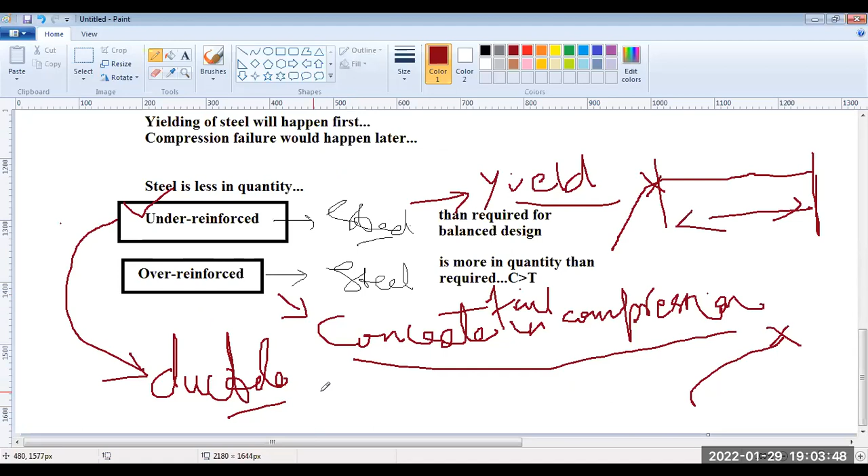So what I was saying is that the first reason for under reinforced design, I just discussed that. The second reason for under reinforced design is... just a minute, there are many others joining.

So the first reason I've explained to you, that we allow it to go into the ductile zone. The second reason is that balanced design does not work always. Why doesn't it work?

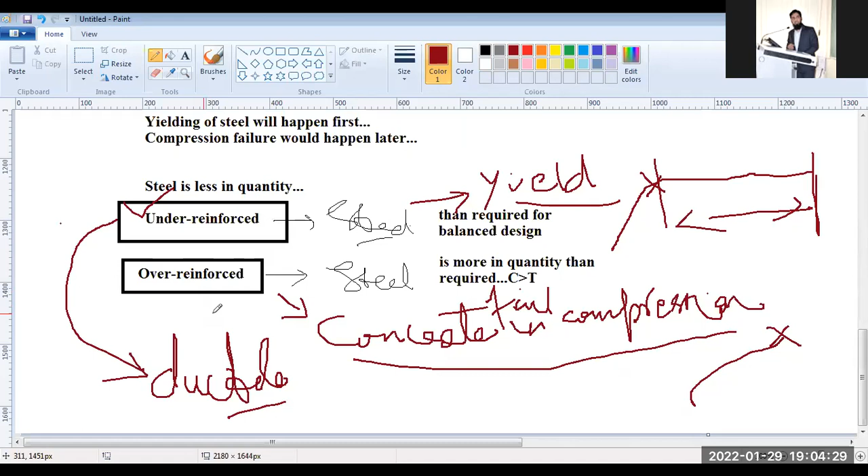Because you will never get a section where you will be able to achieve the balanced design. Why? Because it involves the compression side, where you have FCK, B and D. Now FCK has to be clear.

If its FCK is 20 megapascals, if its strength is M20, it should be M20. B should be clear, it has got the dimension. D should be clear. Now these two, B and D, can be maintained, but FCK cannot be maintained in concrete due to workmanship problems. And I've already discussed that if you are getting 20 megapascals for a cube in the lab, at the site you may not get 20 megapascals.

So whatever is desired, you will usually get less FCK at the site than desired. But FY is not a problem, because steel is manufactured in a workshop, in a factory. So FY would always be perfect. Whatever result you got in testing in the laboratory for FY, you will have the same FY for the steel at the site as well.

So if you are designing for a balanced approach, you took FCK as 20, but actually you got less than 20, so your XU will get more, because when this FCK becomes less than 20, your XU will increase. What does XU increasing mean? This means going towards over reinforced design. So over reinforced is a much more problematic design approach, because that leads to much earlier failure of concrete in compression due to brittleness.

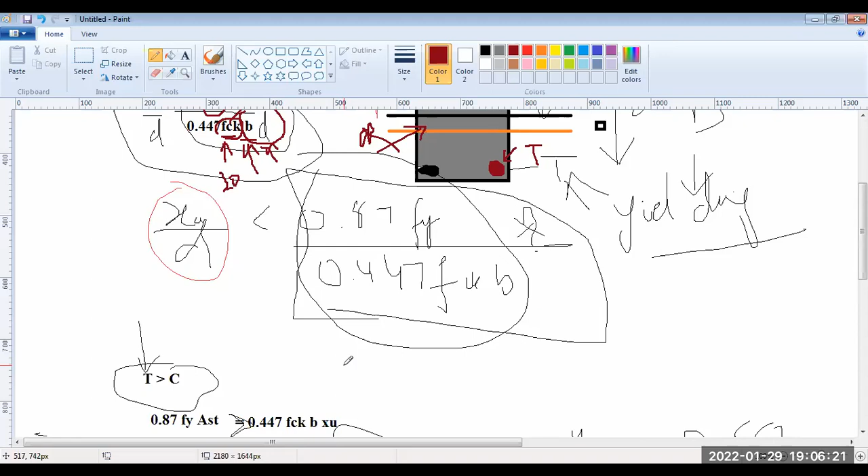Clear? Anyone who couldn't understand this second point? Anyone who couldn't understand the second point? I'll repeat it again then.

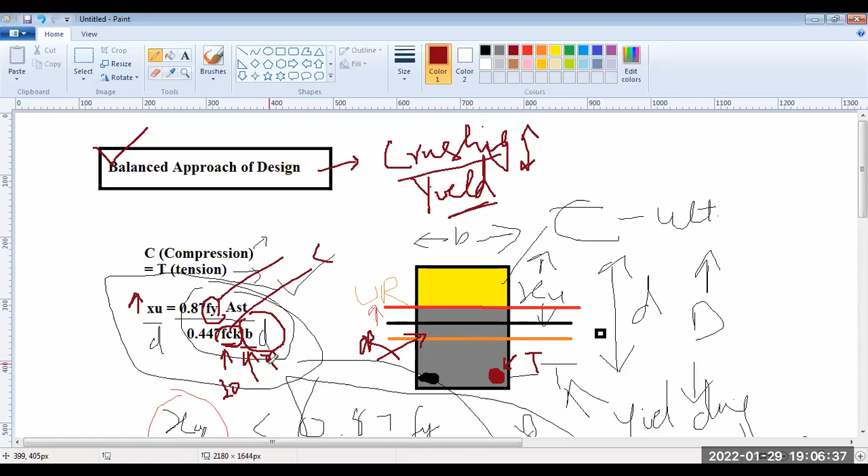So what I just told you is that we have to go for the under reinforced design approach in our design for structures. Now that would mean we take under-reinforced as the design approach in our design. Most of the time we adopt this.

And here now, what is clear is that your XU will be less than XU max. What is maximum XU? Maximum XU we will call that which is for balanced design. So here for under reinforcement, it is less than XU max.

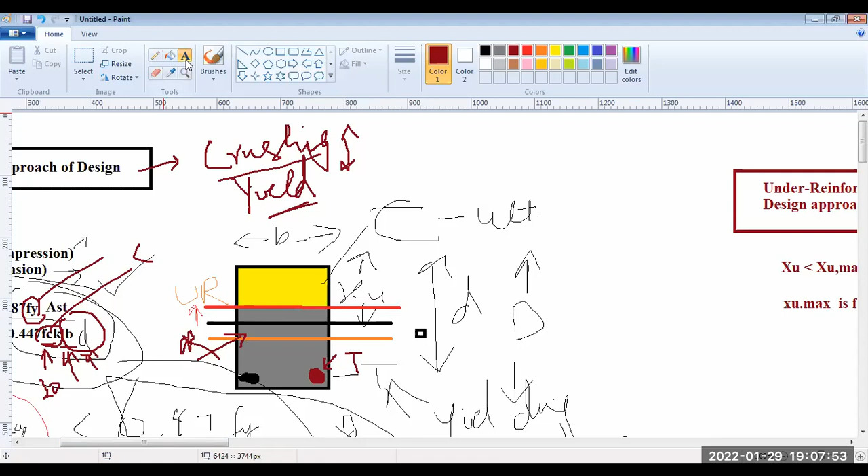I'll just redraw the same figure that was drawn here. This is your rectangular beam section, for example. Let this be in black color. So this is your balanced. Then you have the red color now. This is your under reinforced.

So this will be your XU, and your XU max is this. XU max is this one. So XU max is for balanced, and XU is for your under reinforced design. So we take XU less than XU max.

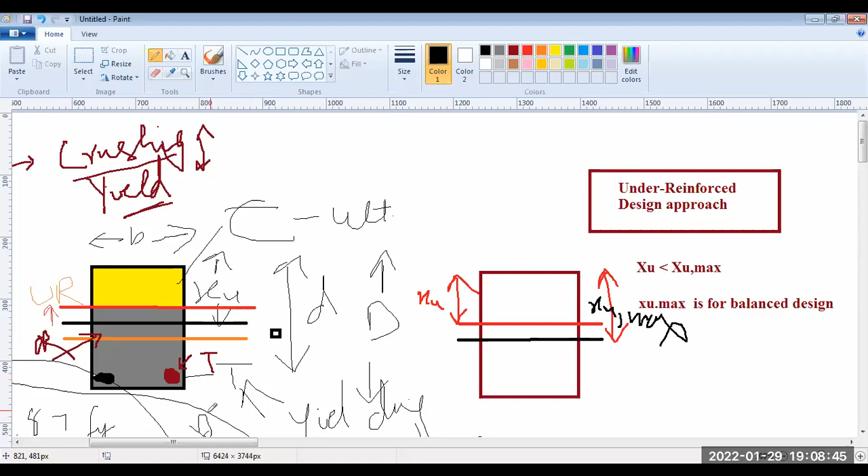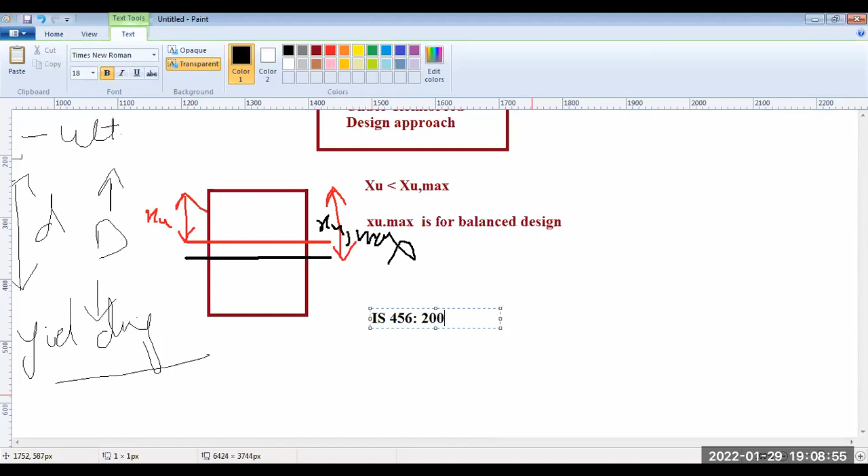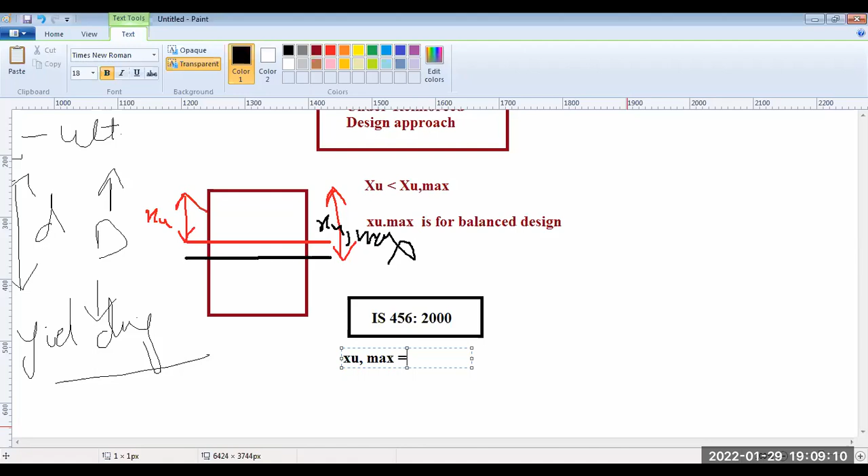Now, as per codes, for the first time we are using the code IS 456 2000. We'll be using, as per codes, the value of XU max given to us, but you can calculate this as well. Let's calculate it. What is the value of XU max? It's 0.87 FY AST by 0.447 FCK B.

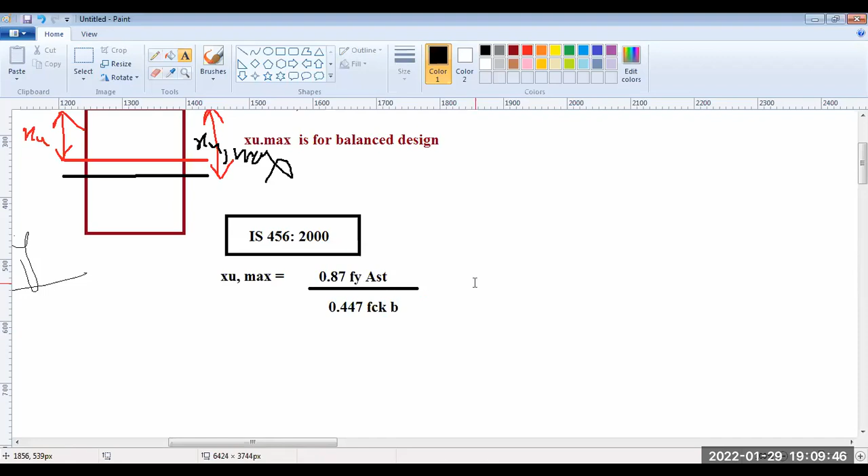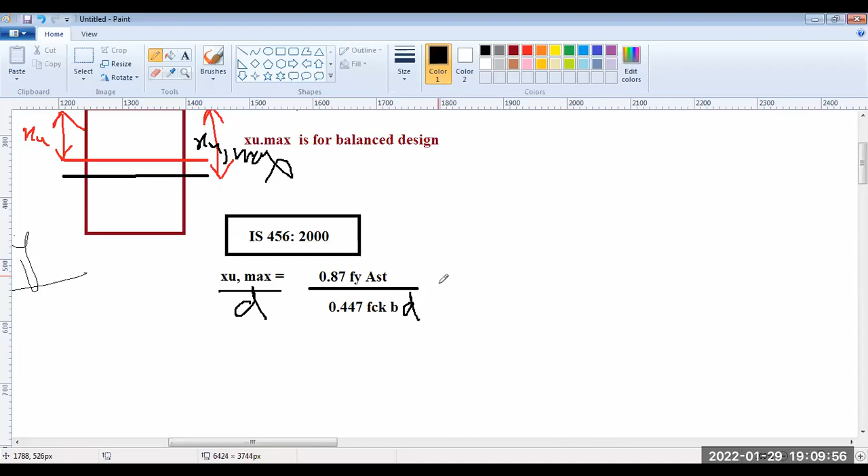Now, if I again add D on both sides, this would be equal to... FY will have different values. For example, if I take FY of 500 grade steel, its FY will be 500 megapascals. If I take Fe 500, then it's 500 into, before that there is divide, this is 0.447 FCK. For example, you are taking 20 megapascal strength of concrete, then into this you will get AST by BD.

Now, what is AST by BD? What is AST? Any one of you? What is AST? Bar. So it's the total area of all bars of steel in tension.

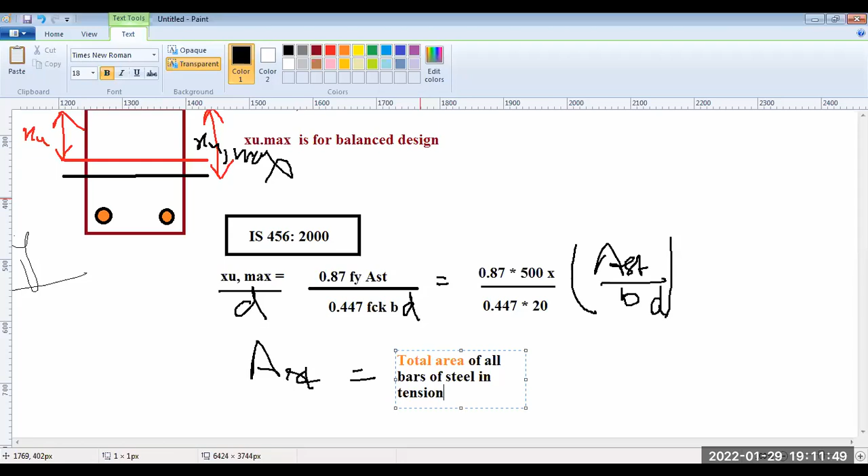AST, A means area, S means steel, T means in tension. So tension is on the bottom side. The bars which are in tension are the bottom bar steels. So that's AST. So on the tension side, whatever total steel is there, its cross sectional area - there are 2 bars, so their total combined cross sectional area is π/4 d square, D is the diameter of this bar, and the other bar similarly π/4 d square, and combining both you get AST. So the total cross sectional area of these bars.

What is B and D now? What is B and D now?

This is your B and D. D is your effective depth of the bars. So what is B cross D equal to? B multiplied by D, what will it give?

Any one of you? Yes, Sahil is here. What will be B cross D? So, area. Area of what? So cross section of concrete.

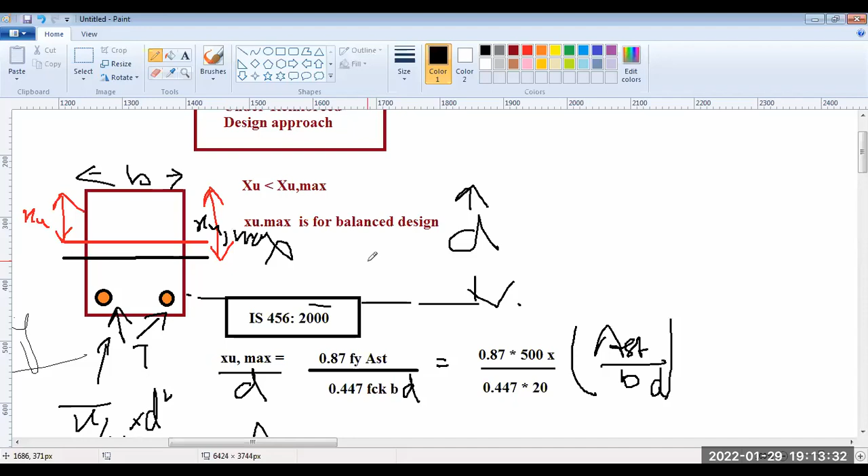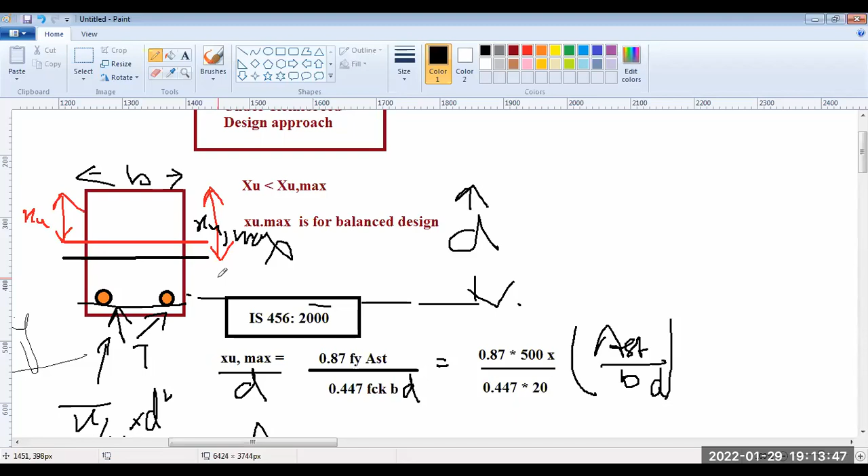It will be cross section of concrete, area of concrete. So it will be effective area of concrete, excluding the cover. Because we are taking effective depth, we exclude the effective cover, rest of the area of concrete. So this is area of steel in tension, and this is area of concrete.

So area of steel by area of concrete will give you percentage of steel in concrete. Percentage area of steel in concrete - how much area of steel is there within this body of concrete? Total body of concrete mein kitna percentage area aapka steel ka hai? You can get from this, but once you multiply it by 100, then you will get the percentage.

Right now, you're just getting the ratio of the area of steel to the ratio of the area of concrete, effective area of concrete. So this is AST by BD.

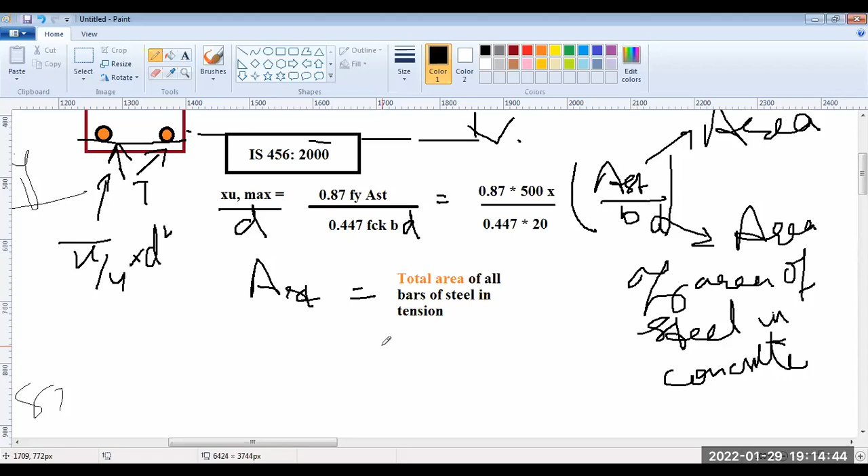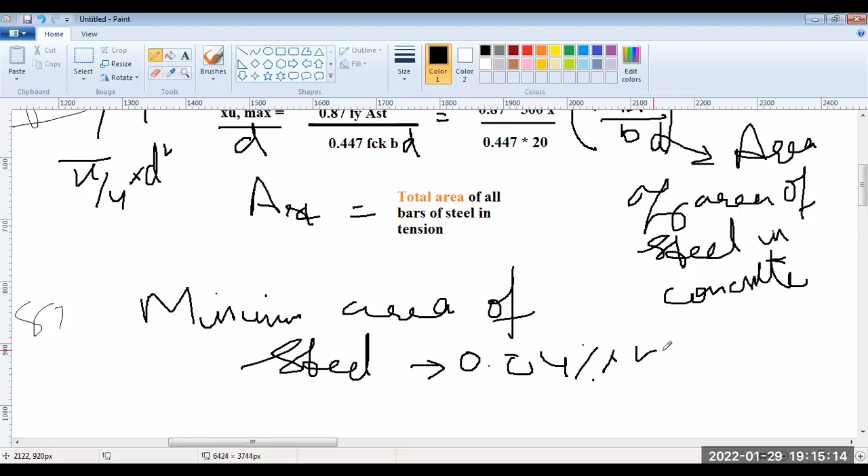Now there is minimum amount of steel that we have to always provide in concrete, minimum in beams for example, minimum area of steel has to be provided. And the minimum area of steel that we provide is 0.24% of BD. This is the minimum area of steel that we usually provide.

So if you now replace this by 0.24, you will get the value of XU max by D for minimum area of steel ke liye. Now, why is there minimum area of steel? I'll come to that once we move into the design of the beams and the other members.

So right now, if you go to the codes, they have actually mentioned - I'll be sharing with you the codes. You should all have your code in front of you printed, even while this class is going on right now.

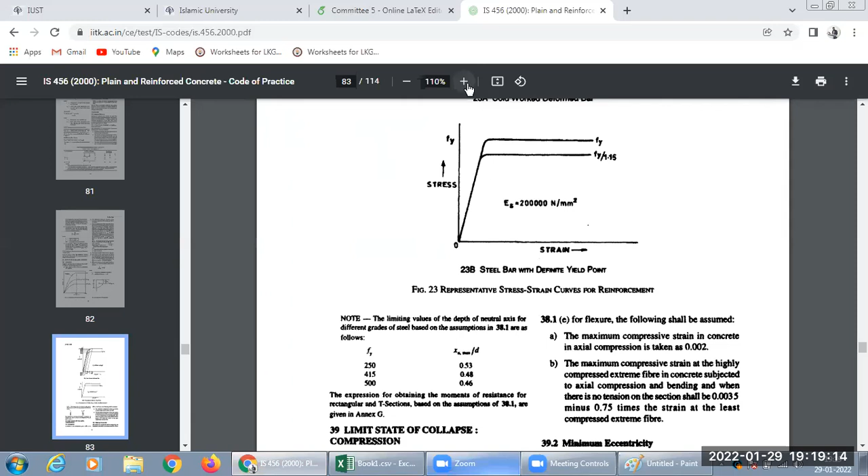This is the limiting value of XU max by D for FY different grades of steel. They have limiting values. This is based on, again, this is based on - they have actually taken AST by BD as the minimum ratio, and FCK, this is around for 20 megapascal, this is valid.

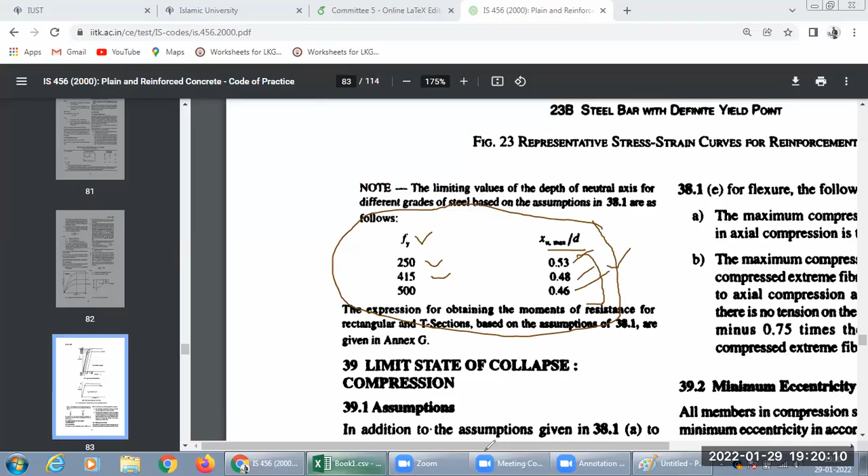So XU max by D has been taken by the code for different grades of steel. So you have to remember: for 250 grade it will be 0.53, for 415 it's 0.48, and for 500 it's 0.46. So these are the values of XU max by D. So you note it down.

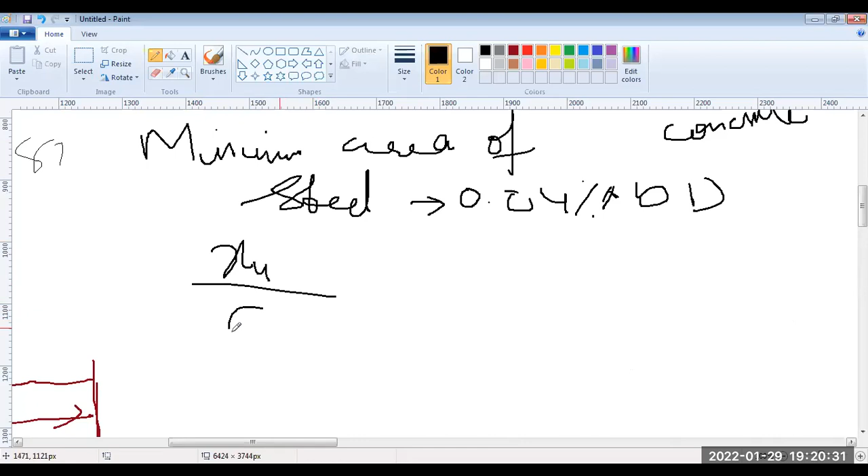XU max by D. So thereby your XU, it's 0.5. How much was it? It was 0.46. If it's FE 500.

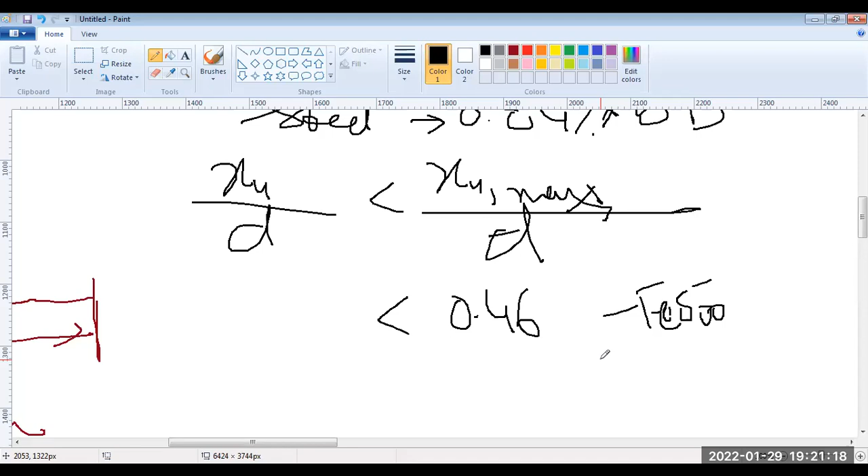So your XU by D, if it's less than 0.46 for FE 500, vaise hi for FE 415 ke liye agar 0.48 se kam hai, then your design is under reinforced design. So this is the concept of under reinforced design approach. Any questions on this? We'll continue further then.

So now what is flexural design of concrete members? What is it based on? We'll go step by step. First of all, you have a beam now, and now we know beam has got a width b. It will have a depth overall d,

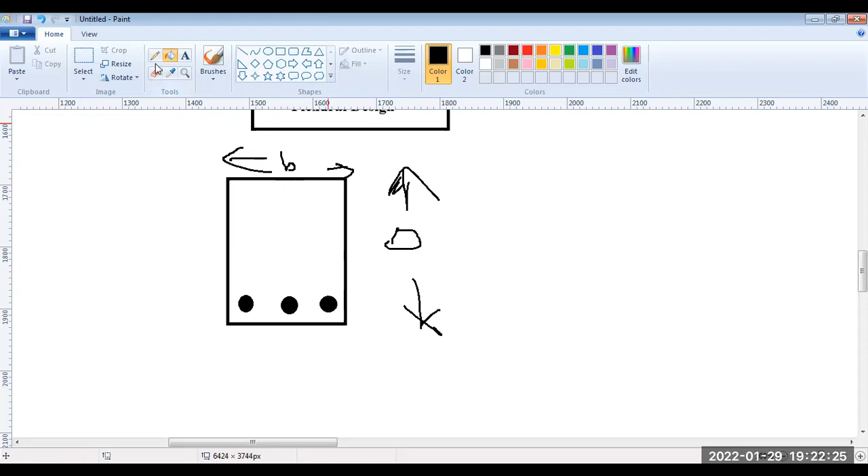and then it will have steel. You will have steel bars in tension zone - 1, 2, 3. How many? 4 or 5? Any number of steel bars in tension zone, these ones. So then you will have this as effective depth d. From where till up to which point is the effective depth?

Let me show you on larger screen. For example, you have this as the - I'm enlarging this figure.

This is concrete, the outer section of it. I'm cutting the section somewhere here. This is the bottom portion of the concrete I'm showing you. You have the steel bar somewhere here, one, and similarly another steel bar here. Now this center line going through this point here.

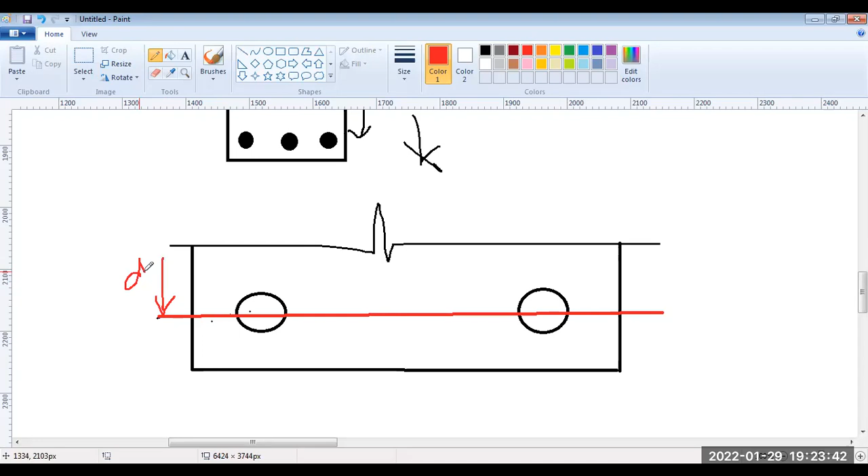This decides your effective depth. So effective depth you always calculate above this line, the center of the bar D, up till the top of this beam. That's your effective depth. So what is your effective cover now?

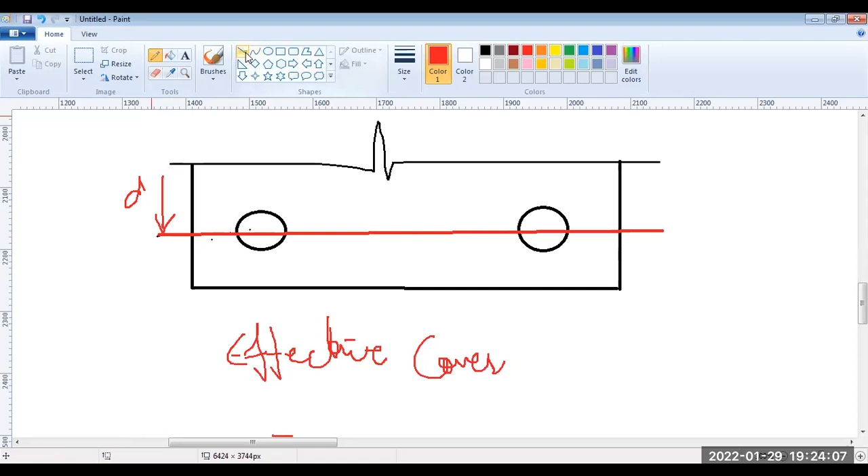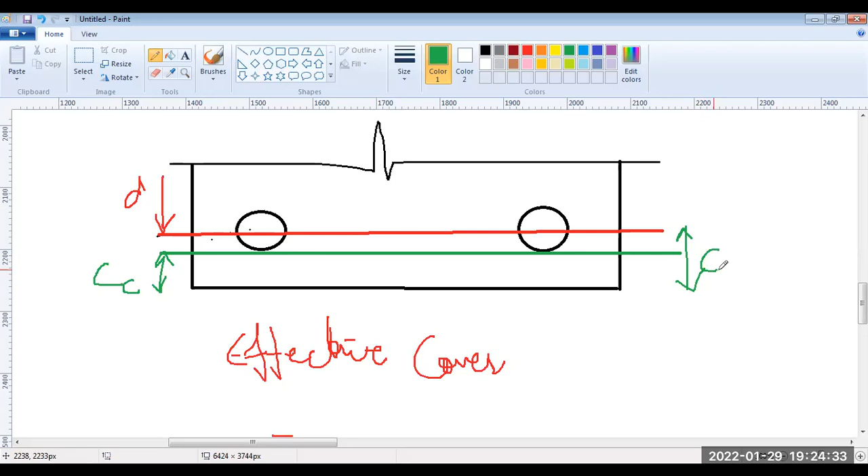How much is your effective cover? Yes, any one of you? It is, number one, you are taking the steel bar ke neeche jo bhi portion hai, if you resemble that by concrete cover C, clear cover CC, and then you have from the bottom up till this red line, that is effective cover. So effective cover CE would be how much? It would be CC neeche jo hai green line ke neeche, and then between these two lines, the red line or green line ke beech mein, it is half of the bar dia, steel bar ka dia.

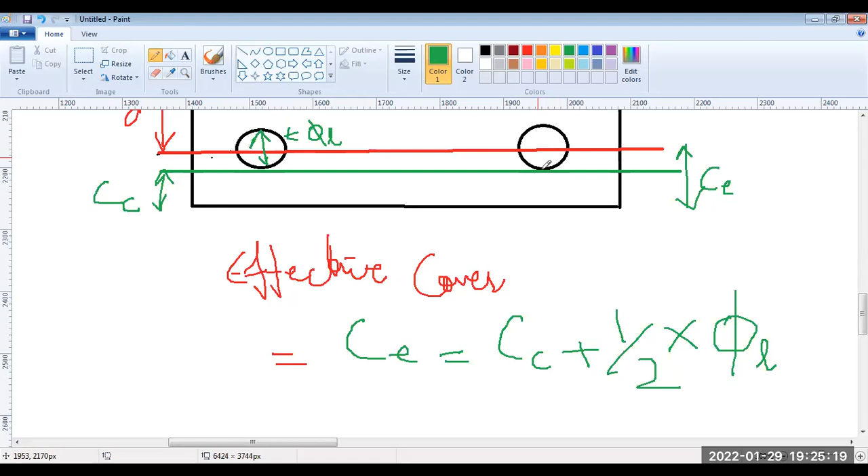If the steel bar dia is phi L, agar uska dia phi L hai, iska, if this is phi L, the dia of this, it's phi L, then effective cover will be CC plus half of this dia, that is the radius of this bar.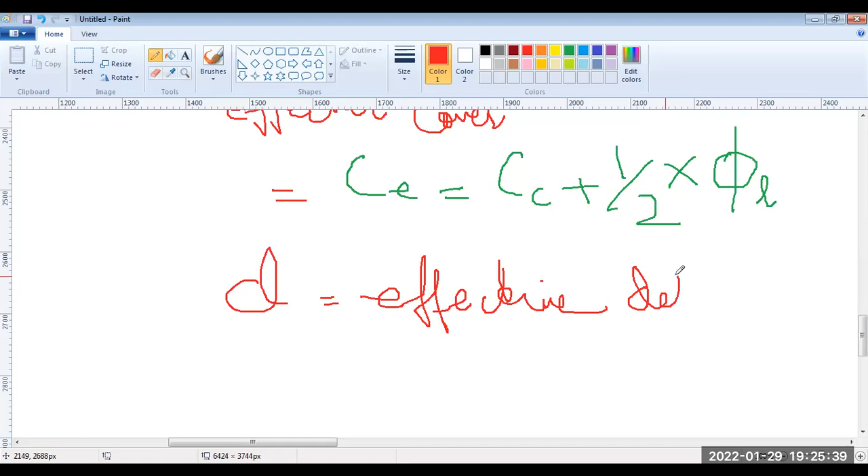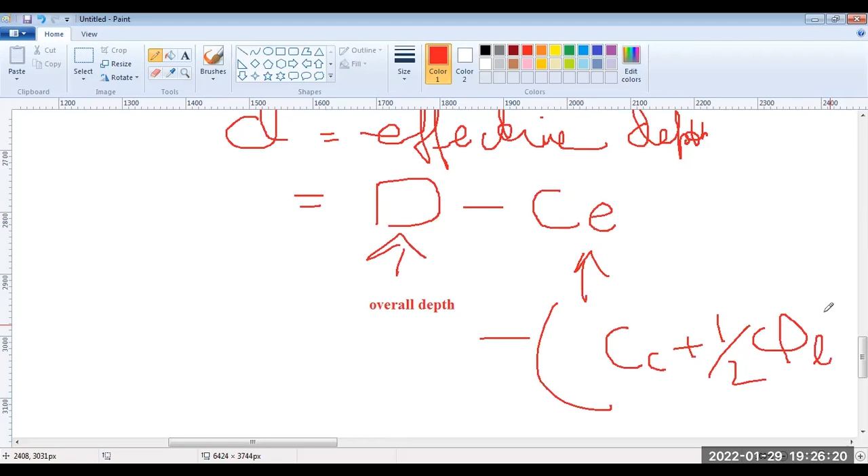So now you are clear that D, your effective depth, is equal to capital D, jo ki overall depth hai, this is overall depth, minus CE. And now you all know that what is CE? CE is this, CC plus half times phi. So you can say it's minus CC plus half of phi L. So this is your effective depth D, from the overall depth.

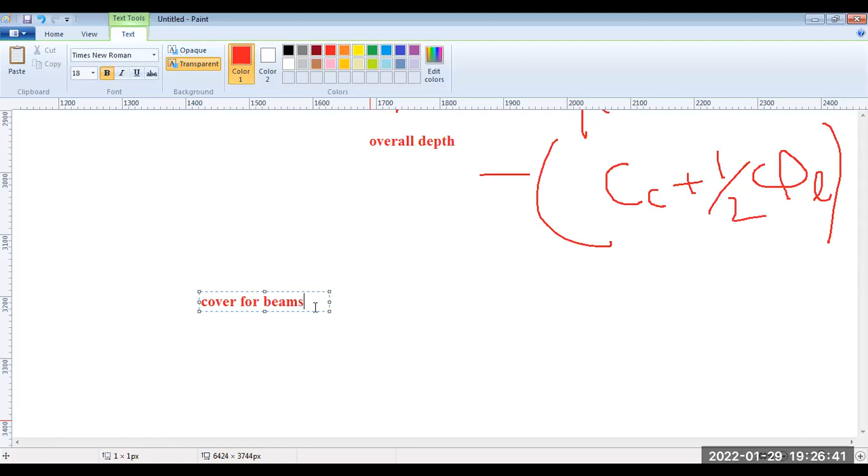Now why do we provide cover? The first question about the cover, why do we provide cover for beams? Any one of you? Up till this point you must have now learned why do we provide cover. Any one of you who wants to answer this? Why do we provide cover for beams?

To prevent corrosion, yes, that's one of the reasons. Corrosion prevention. But first reason always would be because we want to embed steel.

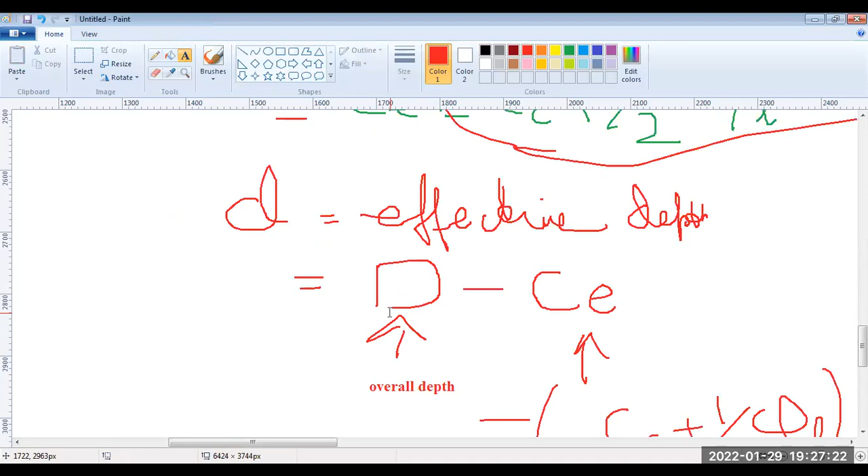Embed means where will the steel act together with beam agar wo steel iske saath bandha nahi hoga with the concrete. So you cannot tie the steel. Aap steel bar ko bahar tie nahi kar sakte aise beam ke saath at the bottom and then say ki main ye tension lega. It will not happen. You cannot tie this. So you have to embed it within the concrete.

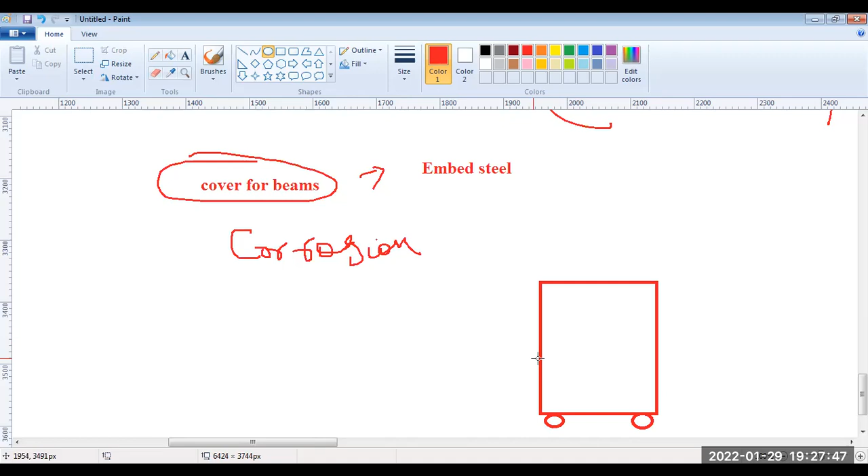So for embedding you require certain amount of cover. Now you would say that you could embed it like this. Why to provide anything on iske neeche kyun kuch dena hai? So yes, you can do this. So that's then the first reason, to keep the steel within the concrete you have to embed it.

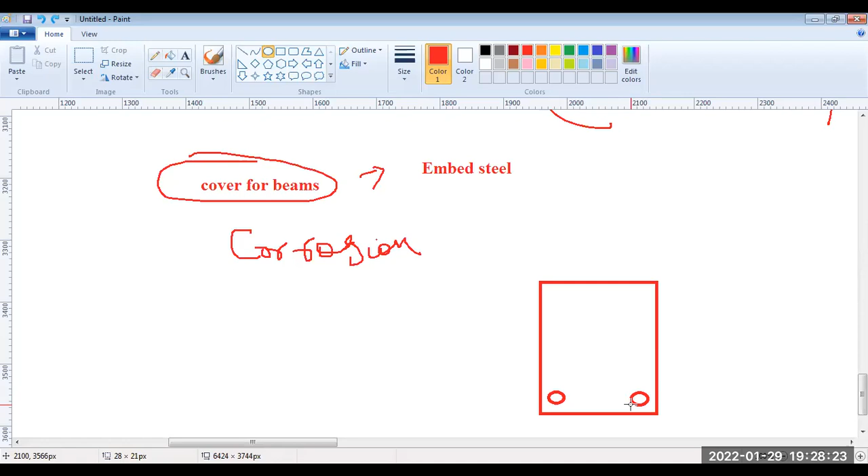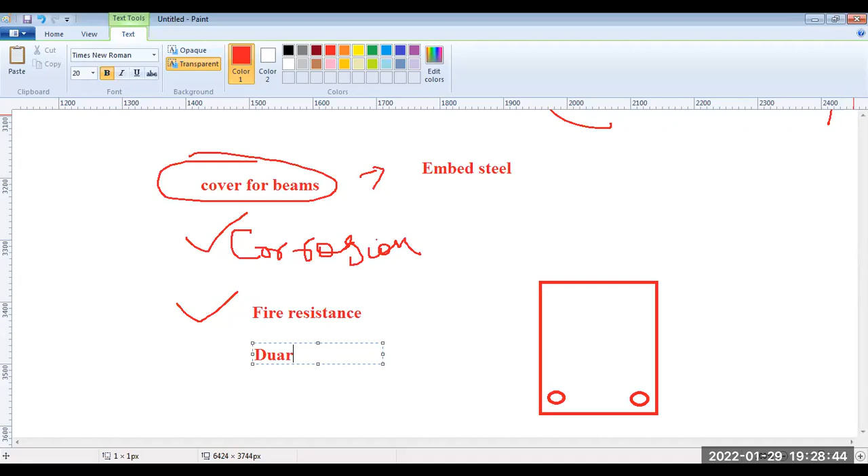Second reason to shift this, kyunki hum isko ab shift kar rahe hain, yahan bilkul neeche provide nahi kar rahe hain, hum isko we provide it somewhere after providing the clear cover. To uska reason number one is corrosion. This second reason is fire resistance. That's the second reason. Third reason, other than this, is long-term durability, which incorporates many things.

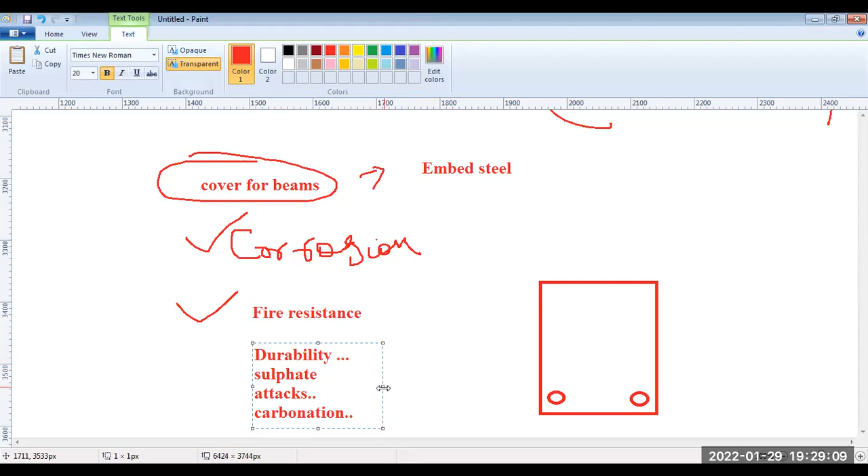We discussed in concrete technology, sulfate attacks happening. In concrete you have carbonation. So carbonation then leads to corrosion. So before that, the carbonation of concrete would have happened. So you need to provide the cover for many other durability related issues other than corrosion, which is also a durability related issue, but that's a predominant one.

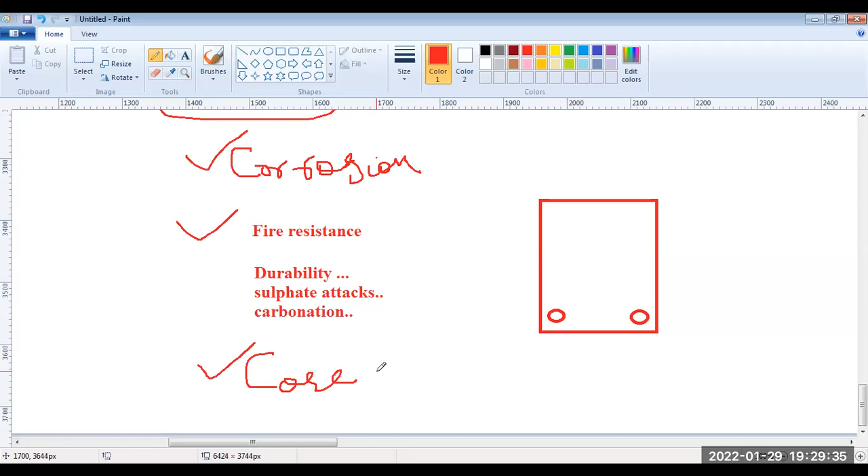Fire resistance, you need to provide the cover. Thirdly, you want the steel to be embedded not only properly, but with proper core within the core of the beam or column or any other element. You want it to be embedded within the core of that, such that it behaves together with the concrete.

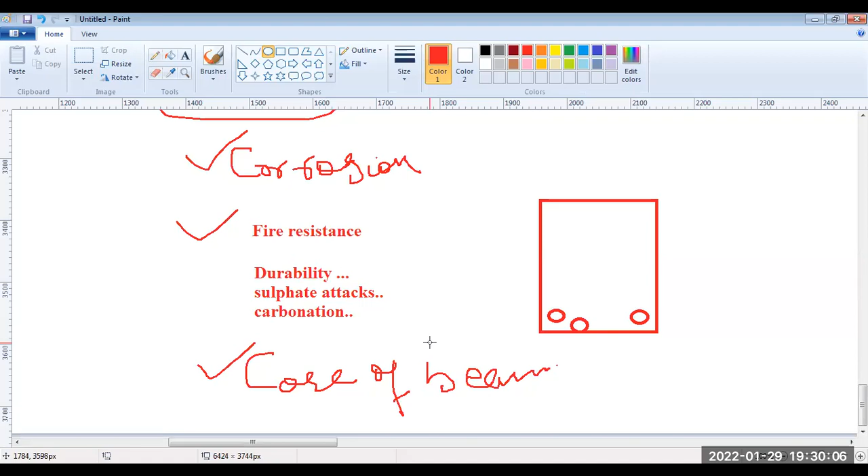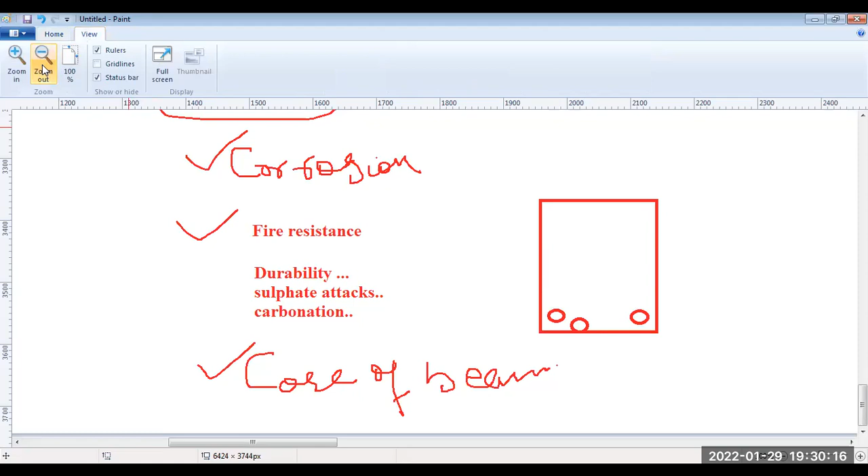Agar ek side se iske concrete na hua, if this bar was just near, so ek taraf se ye embedded nahi hota, then there would be no bond on this side. That would mean the bond strength would be lost between the two. They would not behave together. So these are the reasons that we provide cover to any structural elements. We also are providing cover to the beams as well.

Next, after cover, now you have for the same beam, next you are providing the steel. Other than steel, you are also providing, I'll make from another, this, you are providing a ring in the beam. Aur is ring ka kuch apna diameter hoga. So you would have something like this, a thick thing. This is a ring.

To ye ring hai kya? What is it? It's known as stirrup. For a beam, it's known as stirrups. Stirrup, S-T-I-R-R-U-P, stirrup. Now what is a stirrup?

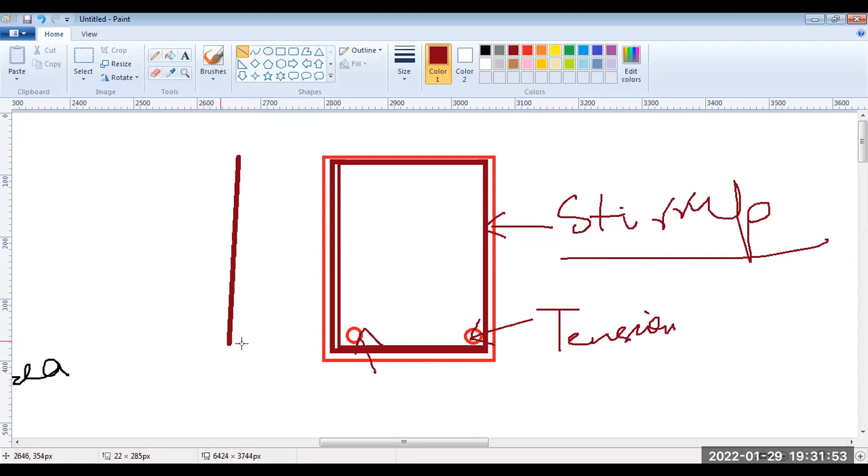What does it do? Is bar ka humein ab matlab pata chal gaya that it's taking tension. Why is this stirrup provided? Why is the ring provided? Any one of you who has a guess? Any guess? Any one of you who can guess? Stirrups are provided to take the shear loads.

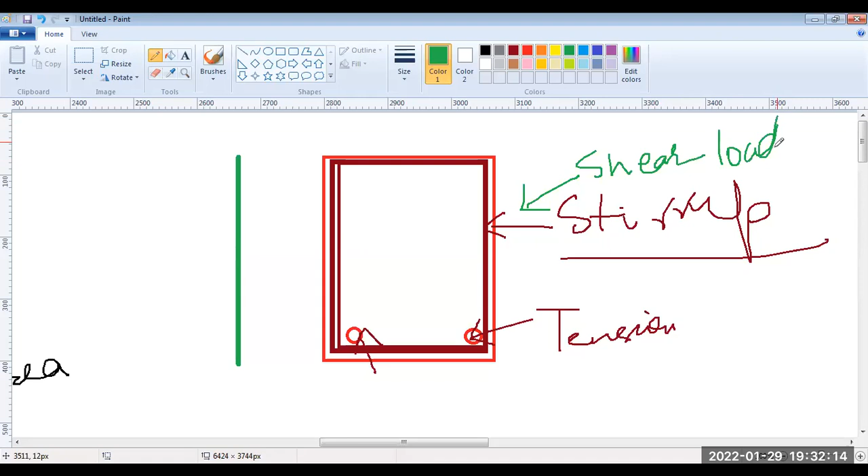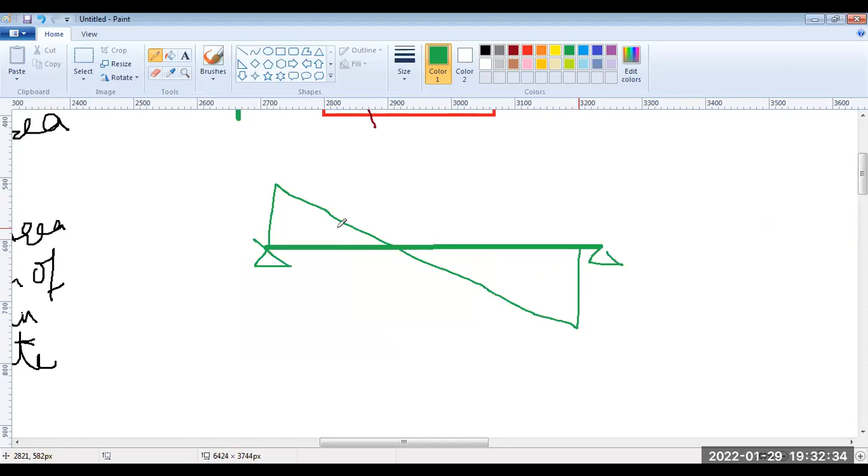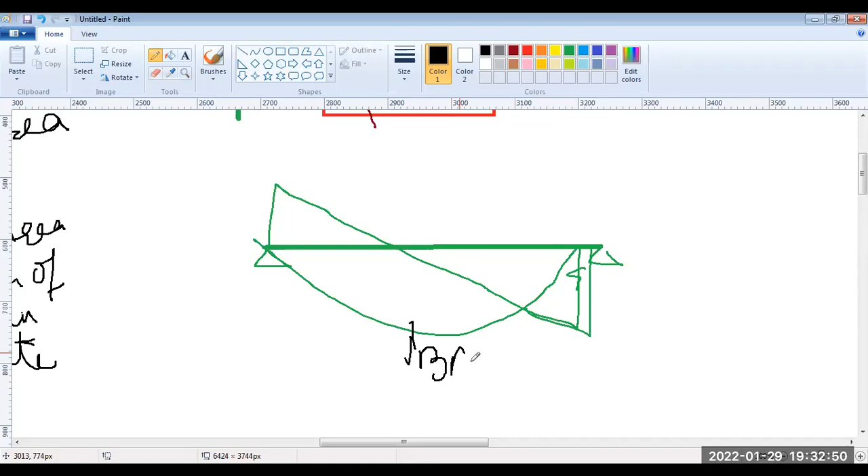How do the shear loads act in a beam? आपने पढ़ा होगा in structural analysis, you have a beam and then it's supported on the two ends, one and this is two. At the ends, you have more shear forces towards the supports. Similarly, your bending moment is more at the center rather than at the support. This is your bending moment and this is your shear profile for the beams. Now shear forces, they are more towards the supports.

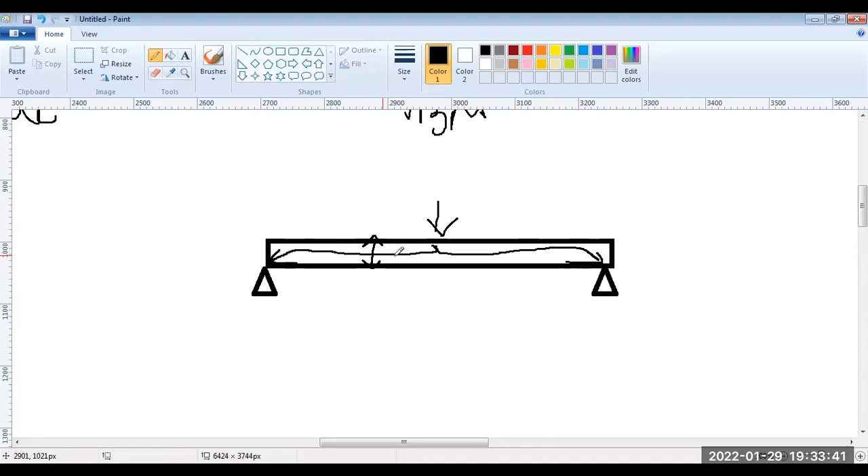How do the shear forces actually act onto the beam? This is your beam along with its depth. If there is a load acting here, forces travel like this. They have to go towards the support. हर force को it has to travel like ये पानी की तरह flow करता है towards the support. So shear forces are traveling towards the supports. They usually take the center path. ये center. तो जो ये depth है इसकी, they are taking the center path. Most of the forces are going through the center path.

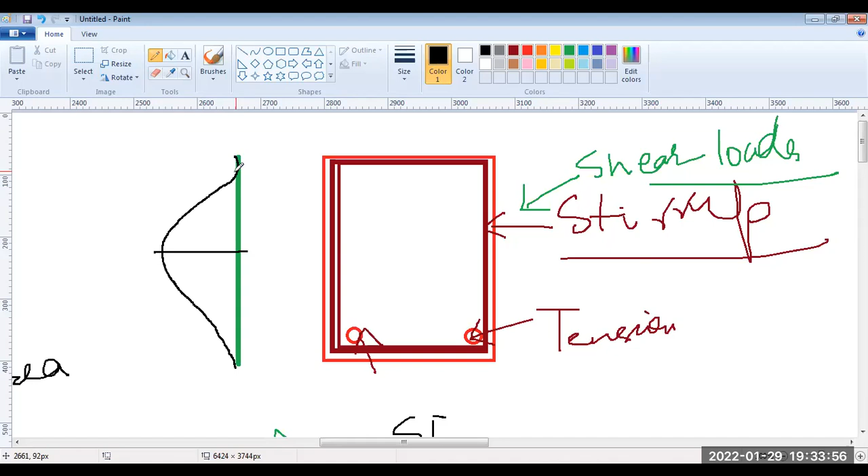So thereby, the maximum shear forces are at the center along the depth of the beam. So the maximum shear force, it's a parabolic graph, minimum at the edge and maximum at the center, right at the center, not at the neutral axis, but center. Neutral axis is a different thing that's meant for compression, flexural forces. This is shear force. So under shear force SF, you have the maximum forces acting at the center depth of this beam section.

So वो prevent करने के लिए, now how do the shear forces then cause failure? They will cause failure towards the center along this central plane, shear plane, and the shear plane would then be the depth of this. But कैसे act करेंगे? At the center of this, it will be acting more. So जो ये screen है, इस screen के बिल्कुल perpendicular the shear forces are flowing. यहाँ पर they are flowing perpendicular. I cannot show you that. अगर मैं पेन लेता हूँ, it could be flowing through the screen at जो मैंने mark किया this point.

So how do you prevent that shear failure from happening? You are providing stirrups. तो stirrup क्या करते हैं? They are taking the shear forces along this plane at the center. How? By anchoring the forces towards the top and the bottom. वो forces को distribute कर रहे हैं towards the top and towards the bottom. इसीलिए एक ring की तरह इसको stirrup को दिया जाता है. So they distribute these shear forces towards the top and towards the bottom.

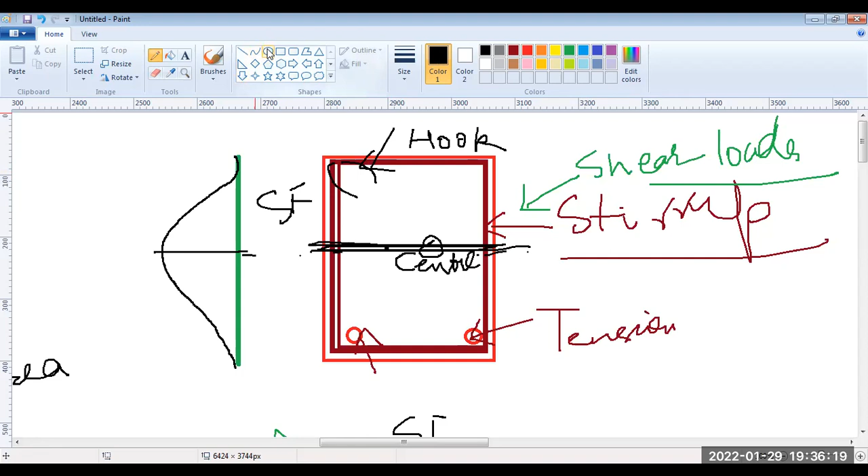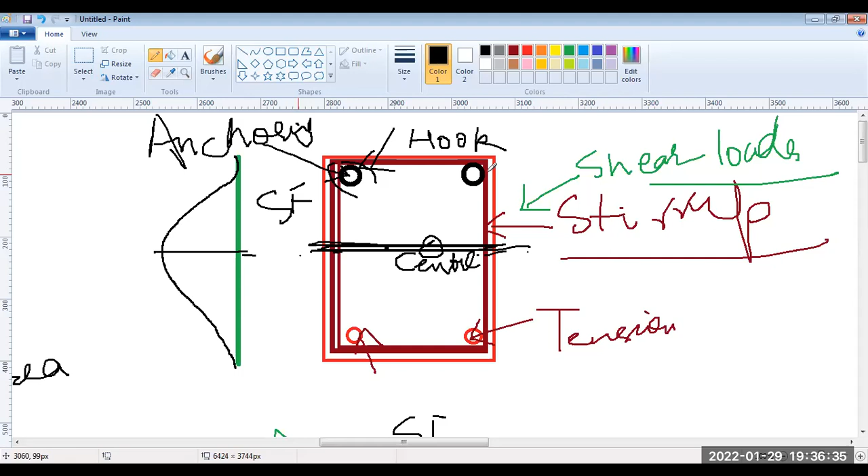So then you have to provide anchor bars here on the top side. So the purpose of these bars here is they are only meant for anchoring. There is another bar here. Their purpose is anchoring. So you have to provide at least 4 bars for the stirrup, एक रिंग को खड़ा रखने के लिए. There are already 2 bars at least here in the tension zone always. उससे ज़्यादा भी हो सकते हैं, but at the same time you will also need the anchor bars towards the top. So this is a stirrup.

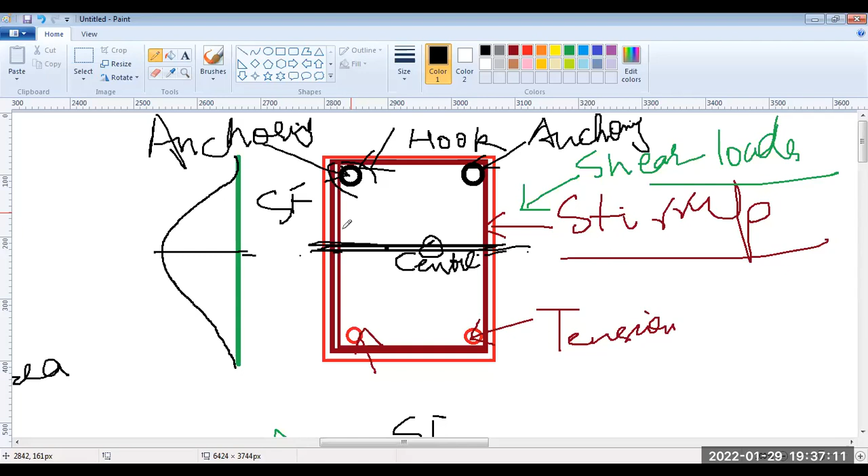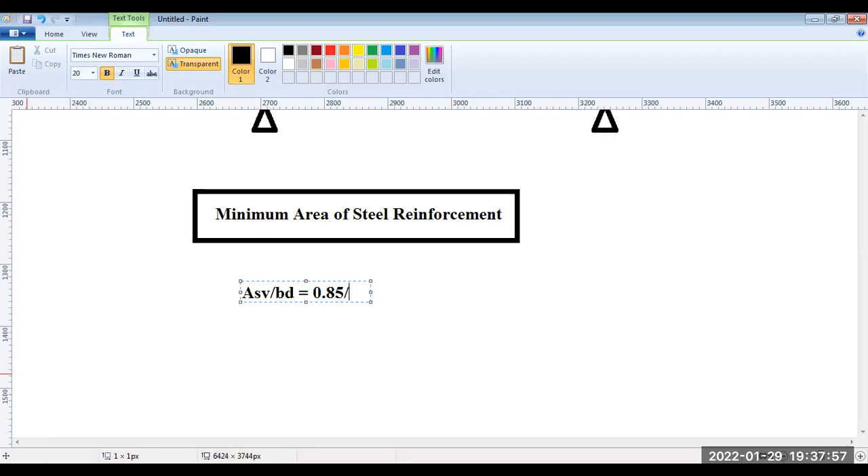Now there is a limitation as per IS 456, which I just told you, the minimum area of steel reinforcement. What is the minimum area of steel reinforcement? As per IS 456, it is ASV by BD is equal to 0.85 by FY. I'll again check from IS 456. Probably this is the formula. Just a minute.

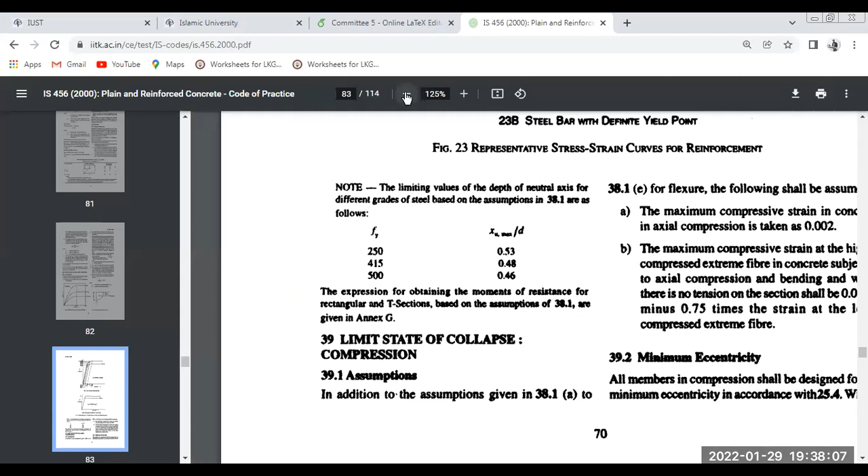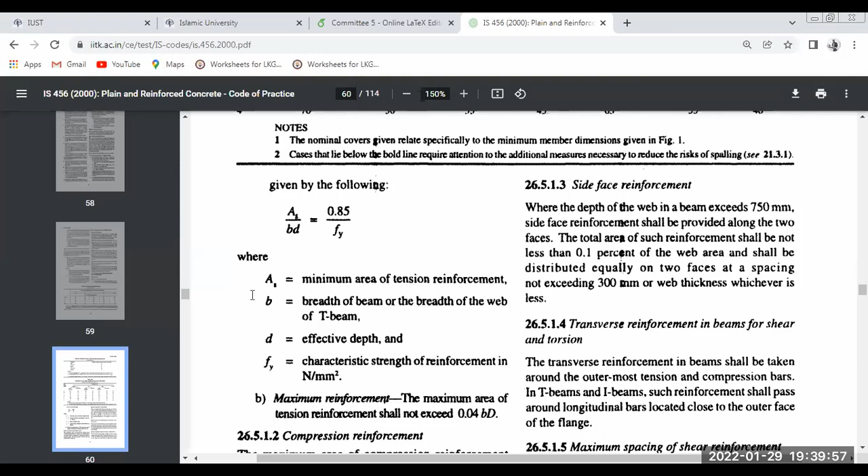Reinforcement that you provide shall not be less than this: AS by BD is 0.85 divided by FY. Do not keep this as ASV, this is AST. It is just AS, but we'll keep it as AST. So what is AST? It's area of steel in tension.